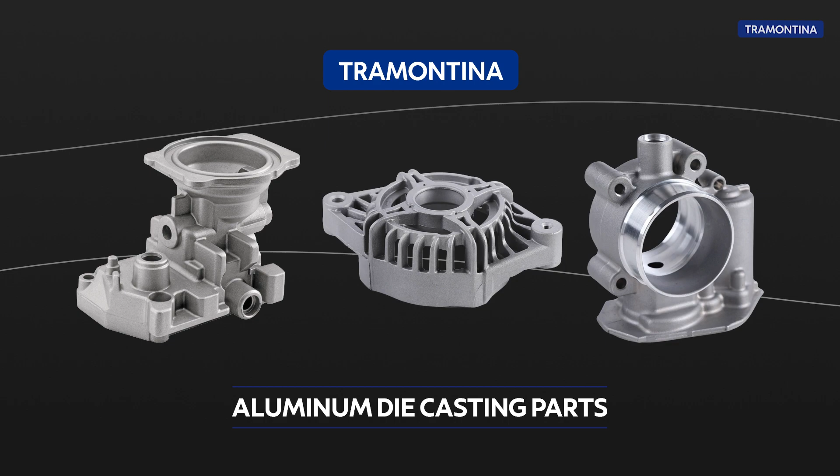Tramontina Eletrik operates in different segments, manufacturing items under the Tramontina brand and supplying aluminum die casting parts. For producing die casting parts, the Tecnopeças division uses certified raw material that undergoes rigorous quality controls.

The customer's products rely on the technical support of Tramontina in the development of production tools, which makes use of its knowledge and has its own mold center for preventive maintenance.

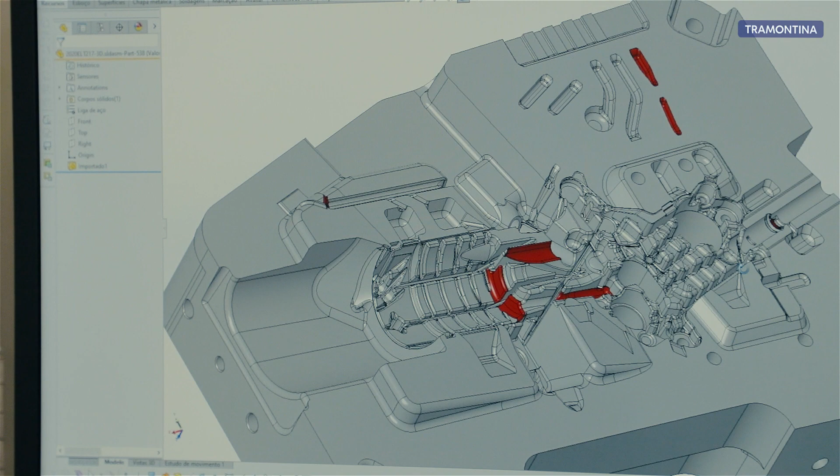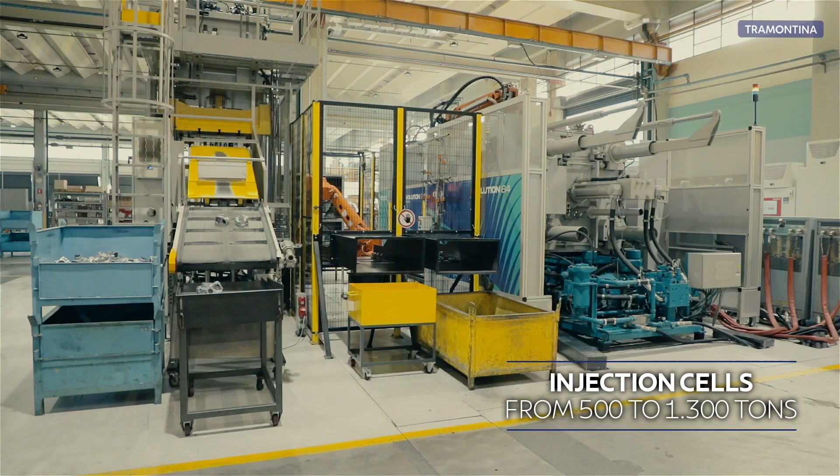Aluminum alloys go through a degassing process to remove possible dross, improving the performance of final parts. Production is fully automated without human interference. Automatic deburring enables repeatability of operation and higher quality of the pieces.

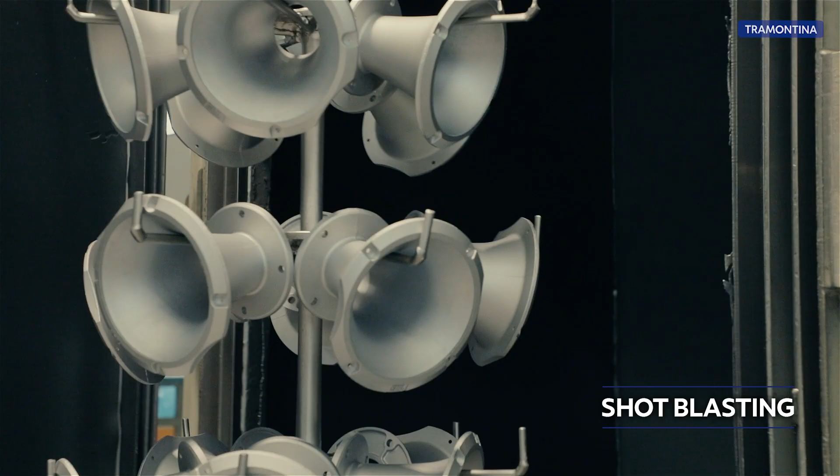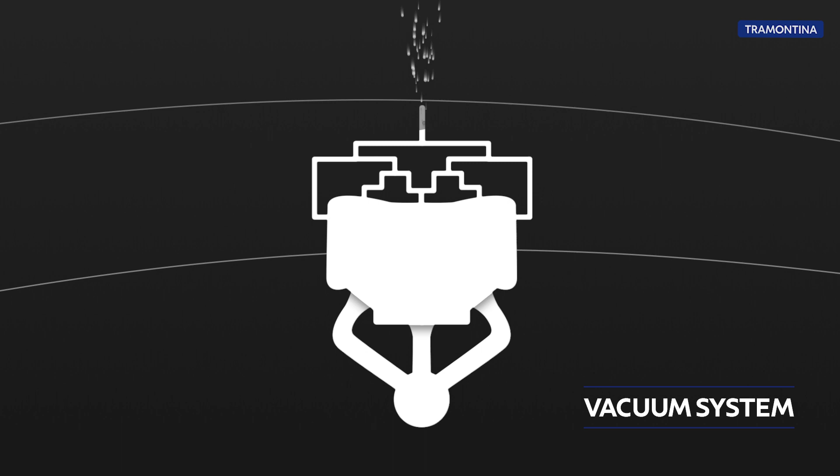Shot blasting ensures uniform surfaces. When necessary, a vacuum system is used to help eliminate possible porosities and better fill the products. To facilitate part extraction, tools have release agent applied by robots.

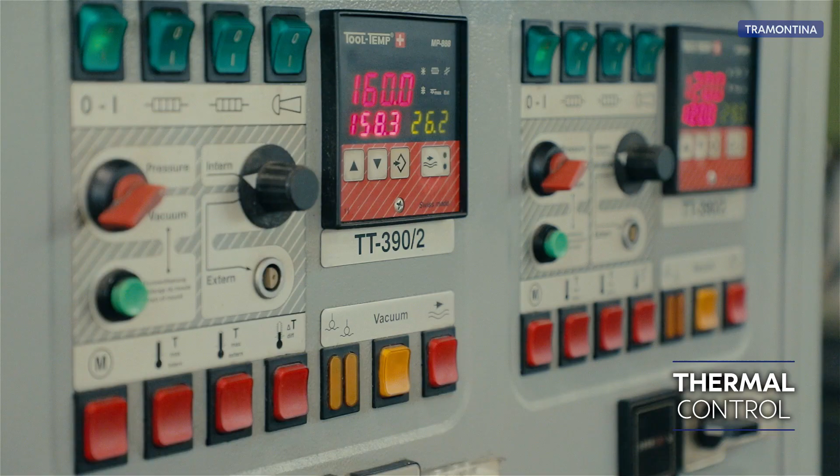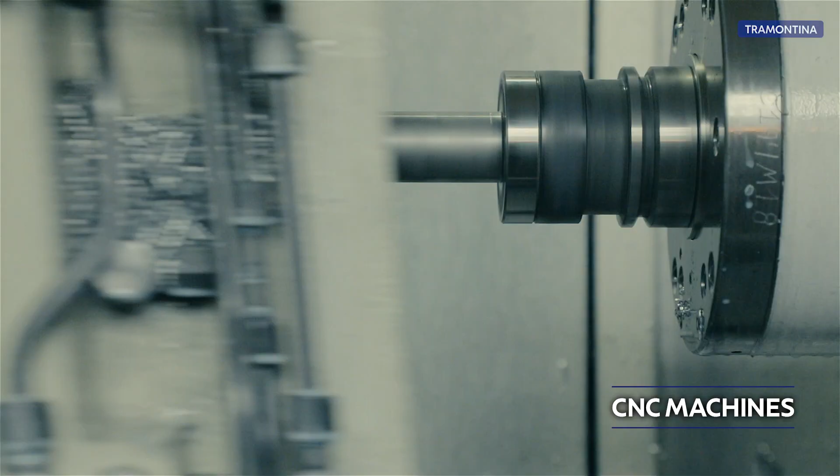The dies work with thermal control, giving the process enhanced stability, and temperature control for raw material ensures better quality of the finished product. In machining, hydraulic clamping devices, tools, and machines ensure precision and repeatability in the process.

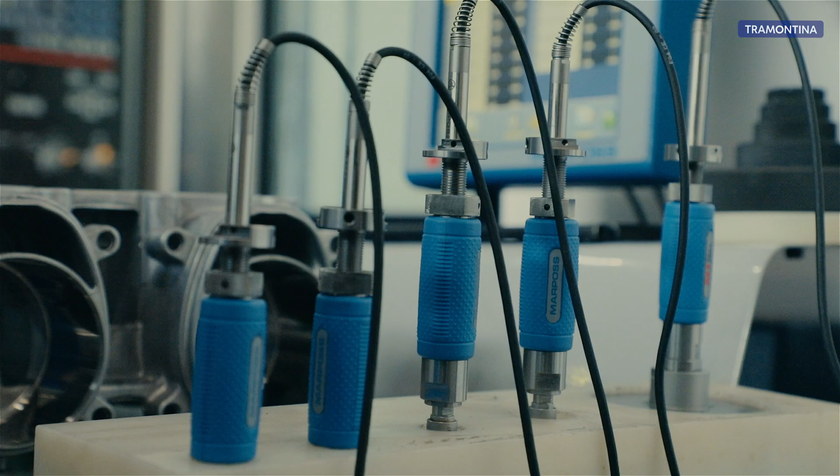To aid dimensional control of products, the cutting fluid is thermally controlled. Inspections and dimensional controls of parts are performed in all stages of the process. According to customer-specific requirements, component assembly and quality testing are carried out.

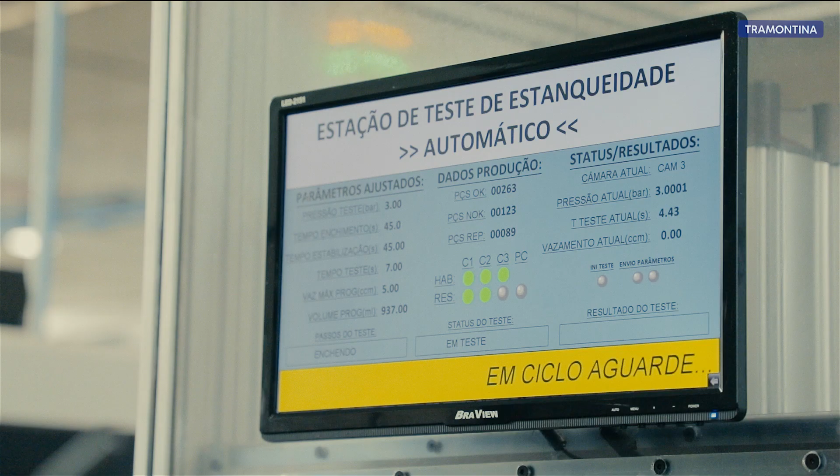Before producing a batch, die casting samples go through X-rays in order to visualize potential defects, enabling fine-tuning of die casting parameters.

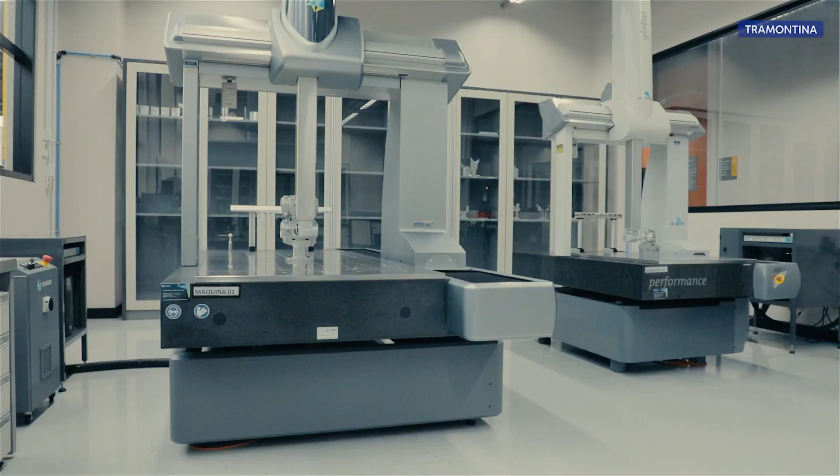Tramontina Eletrik has laboratories for product inspection, control, and certification located in the CEPEGI. Several tests are performed there, according to customer-specific requirements and specifications.

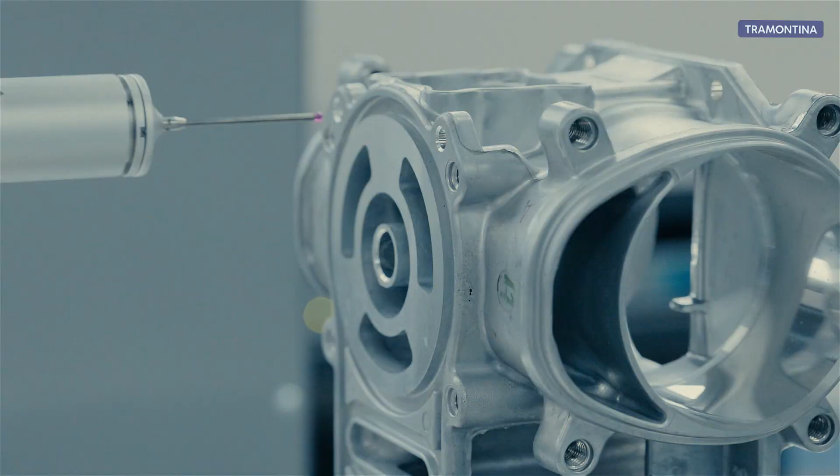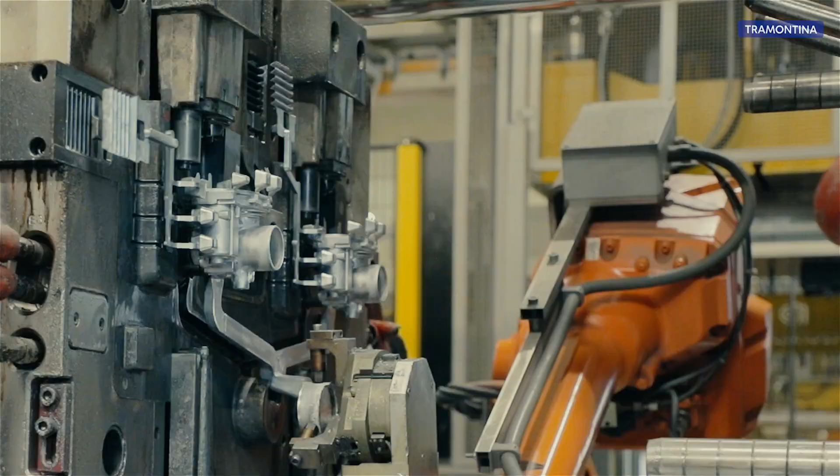Tramontina Eletrik, through its spacious modern facilities, is constantly evolving. Working in compliance with quality standards and using precise, safe, and technological processes, the company guarantees the performance and productivity of manufactured parts. It is a commitment to doing things well, together.